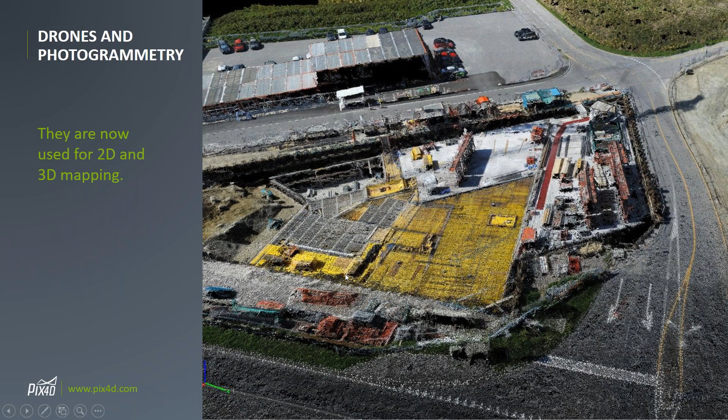So just to summarise, from my perspective, really why drones are a great advantage to the construction industry. I've listed here kind of 4 bullet points I feel are some of the advantages for using drones in the industry.

Having no access to the site is actually quite important. Not having a surveyor or a BIM integration manager or somebody else doing checking or certification walking over the site is a big advantage here. Health and safety is probably one of the most important things that construction companies measure themselves by and are measured by these days. And of course, having less people on site is a huge advantage here for them.

I think the second point is that the equipment is very affordable now, whereas many years ago you probably would be investing tens of thousands of euros plus the actual expertise you need to have to fly these pieces of equipment. Nowadays, you can go to a website and buy these pieces of equipment very affordably. The idea for most of the construction companies I speak to is they'll have a drone on every site, and the drones will be really kind of consumer level drones with a good camera.

I think the third point is very important as well. Traditionally, getting results from a surveyor immediately is probably quite difficult. Obviously, you can use different techniques such as GNSS, or you can use a laser scanner on site and get very perfect 3D point clouds, for instance, of the site.

But there's an investment there in time as well, that you cannot simply fly the drone and get the results within half an hour, which is possible with modern technology. You'd certainly have to go away and spend some time processing the results.

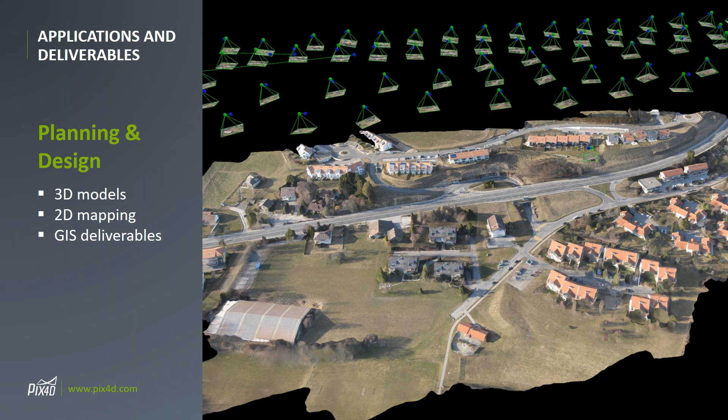And earthworks were probably one of the first ever applications of drones in construction, which became an immediate success because the commercial value is immediate. So rather than walking over a stockpile with your GPS or total station prism, you're actually flying. So it's a much easier and safer way to capture the data.

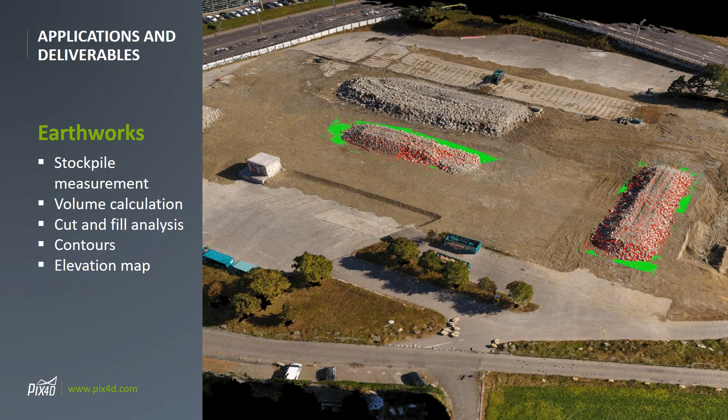And also gathering data on a stockpile from an aerial perspective really gives you a proper view of the complexity of the top of the stockpile and therefore more accurate results. So I think it was a very quick win for drones in construction was to use them in the earthworks industry.

And the real benefits now that are coming from, I think most of you on the call will agree, that the benefits of seeing an image like this on a daily or every few days basis is incredibly valuable for the construction industry. So these ortho photos you're seeing now are highly visual. Obviously they're orthographic, so they're compatible with your CAD or BIM systems, and they're completely scaled and geo-referenced, so you can make measurements from these. They're really like a fully scaled orthographic photograph.

And this can be used for day-to-day operational planning on site. It's a great communication tool. You can imagine showing this to somebody and explaining to them about site access and safety areas and danger zones and where to work next and where to lay down equipment and these things. It's a very good tool.

And in fact, it's very interesting when I visit some of my customers and see them having their site meeting every morning, and on a big TV screen, they often will show these kind of orthographics from the day before and use that as their communications tool to explain how today's work packages will be issued and any particularly interesting points from the previous day's work as well could be discussed. So it really is becoming a great communications tool, just at the operational level.

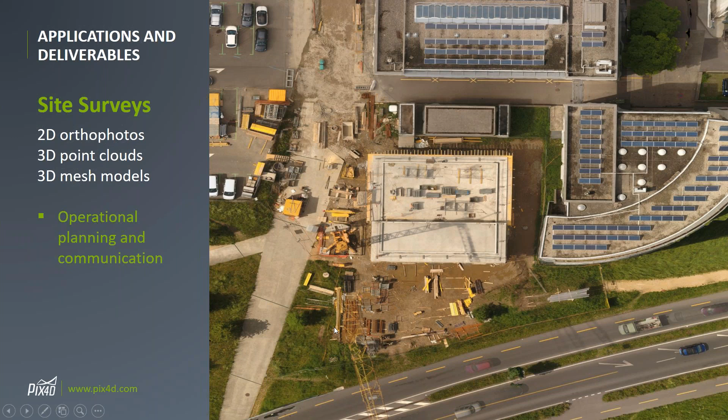But if you extend this to looking at the fact we're getting data on a regular basis, here you see a sequence of 6 days worth of data. We all know construction sites are constantly changing environments, so it's important to track these changes, not just to pick up scheduling errors, but also to work out best practice and these ideas. So having this kind of timeline of information for the construction site is invaluable. These are evolving environments that you need to have the data for.

One of the biggest benefits we've seen from customers using this data, which was surprising to me, was that going back and checking the status of a site on certain dates for legal or contractual reasons has become very important.

Being able to go back, for instance, to the 10th of May and settle an argument with a contractor about whether rebar was positioned or not on that date, or whether concrete could be poured that day, is something that's probably changed how contractors behave with their managers.

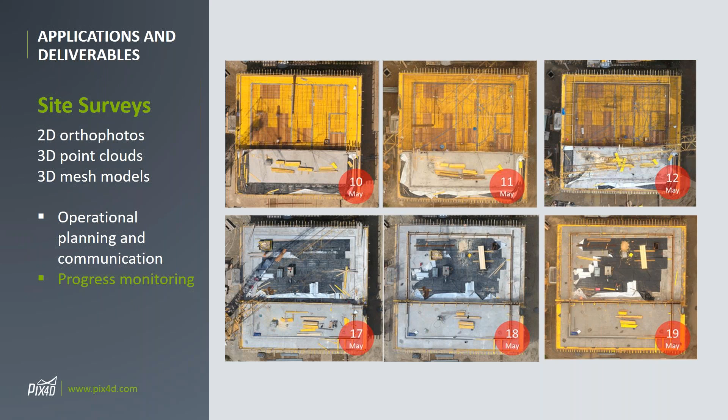Just one small example of how these things really are becoming money saving. The value isn't just in health and safety and convenience - there's also real euros, dollars, or pounds to be saved with this technology if you're regularly checking your site. This is a real example from a customer.

You can see on the 10th of May that the rebar is not quite complete - the meshing is not complete before the concrete pour. On the 11th of May, it's complete. Everyone's happy, we can go ahead, and you can analyze the formwork locations and the exact density of the rebar in different locations.

This is a real story from the customer, who doesn't want to be identified. You can see two small blue circles on the right-hand side on the 11th of May - these are polythene masks used to create a hole in the concrete, a penetration which a downpipe can go through.

Two of them are on the south part of that concrete formwork, but the one in the north is not there - there's a third one missing, and this probably would never have been picked up.

The consequences, you can all imagine, would be that the concrete would be poured and there'd be no penetration in that particular part of the slab.

Maybe 3 or 4 months later, the guys arrive with their stainless steel ducting to put the heating system in, and there's no hole, so they'll go away. The hole has to be created, new concrete has to be feathered in. This creates certification issues and probably delays commissioning of the heating system, which can't be installed on time.

Therefore there's a budget and schedule consequence, and also some safety issues, and I guess the reputation of the contractor or the project owners as well.

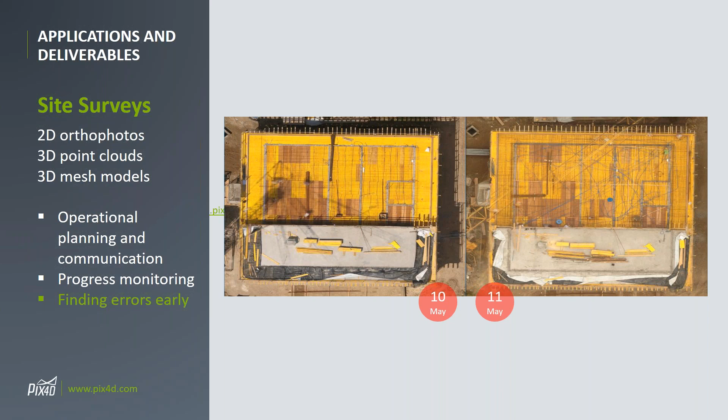Many people doing presentations like this will talk about a number like 15%, which is the cost of a project pre-allocated for rework. If we can start saving some of that money through the cost of drone implementation, this is very important.

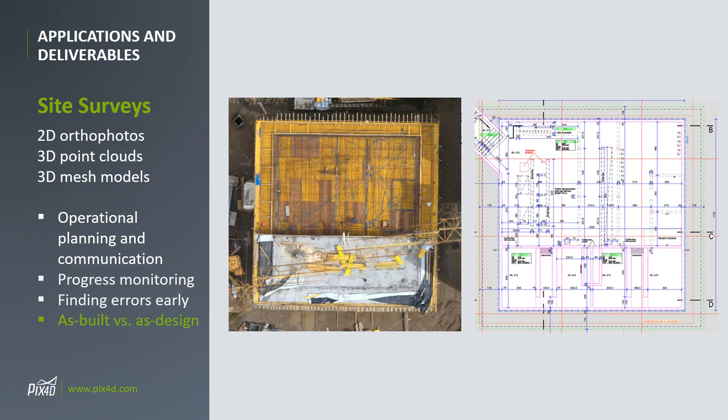I guess the perfect solution is to take your daily drone data and your BIM or CAD design drawings, or maybe your scheduled drawing for that day, and simply overlay them - making them a little transparent as well. You could visually or automatically inspect the difference between the as-built situation and the as-designed or as-scheduled situation. You could see immediately some great savings there.

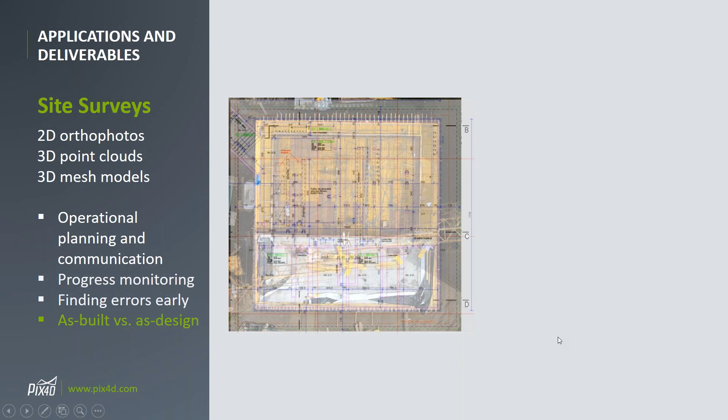Just moving quickly on - taking the 3D data we produce, which is basically a point cloud, similar to what you'd expect from a laser scanner if you put one on site, these can easily be installed within your BIM or CAD applications.

The example here is somebody putting the 3D point cloud into Revit, which is kind of useful, but of course Revit's a design package, so you don't always want to show your as-built data against the design. It's better maybe to use things like Synchro, Connect, or Solibri.

That's really where the construction effort is going in to do some model checking that way. So we can also import this data as IFC into these various other packages.

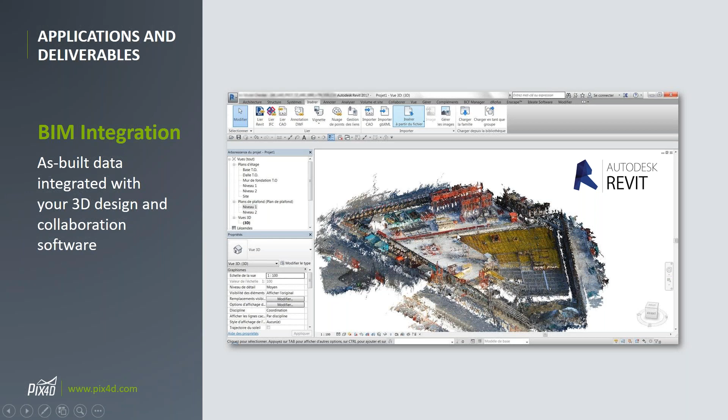And just to bring the whole thing full circle, every point in the 3D point cloud, every point in the 3D models, also has associated with it the high resolution images which we used to create that 3D model. And of course, we give our customers access to those images. So what we're also having here is a full inspection tool where you can go back, select a point on the 3D model, and access these highly detailed, highly valuable images for yourself and start doing inspection.

Either during the construction phase itself, maybe during the handover phase, or certainly during the most important part, the many years worth of operation, where you want to keep this building refurbished and potentially re-maintained. I'll hand over to Harvey in a minute, because I think one of his key messages is that people started using drones in construction mainly as an inspection tool. What's interesting is that it's not just for inspection anymore, people have really moved from using a drone for inspecting to using a drone for mapping.

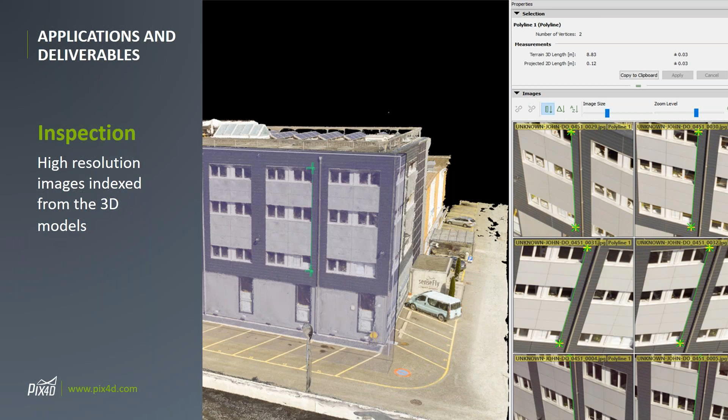On that note, Harvey, I'd like to hand over to yourself. It's with pleasure to introduce Harvey Jessel, who's the Innovation and Technology Manager from Costain. Harvey's going to explain how he started using drones and how that's impacted his values with projects. Harvey, over to you, sir. Thank you, Julian. Thanks for today.

So my name is Harvey Jessel. Currently work for the Costain Group. Been with Costain since 2013, and have undertaken many different roles within Costain. But currently, I'm the Innovation and Technology Manager for Costain on the 820 Thames Water framework. Been on that framework since 2016.

We've actively been using UAVs with Pix4D software to create photogrammetry outputs for all our water treatment plants, leaving a reference point, a digital reference point, every time we fly out on a site. I think that's quite important, because I believe it will be valuable for the next generation in terms of the data set. So that's why we went on this journey.

We've been working very closely with our client to achieve the process of UAV use in construction, including all the governance we had to go through. Thames Water have a standards 28 document, which we had to relook at many times to understand how we're going to comply using UAVs on Thames Water sites. And we came up with quite a robust health and safety process and mechanism.

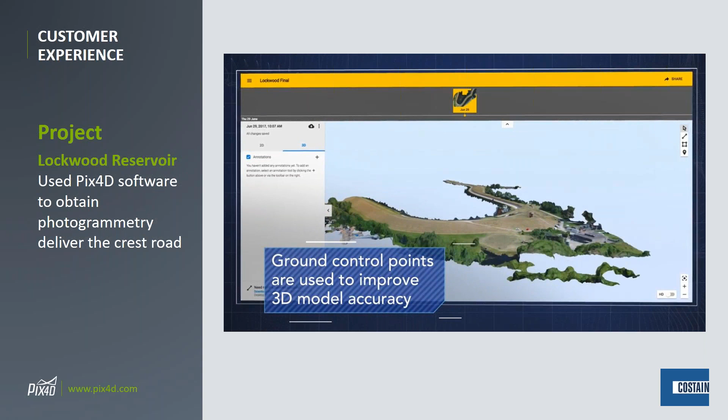So we used 3D photogrammetry because it was a lot safer than having a traditional surveying team out there to capture all that information. So we decided to do it via drone. As you can see in some of the pictures there, we incorporated the DJI app, and we also used Pix4D software on the side.

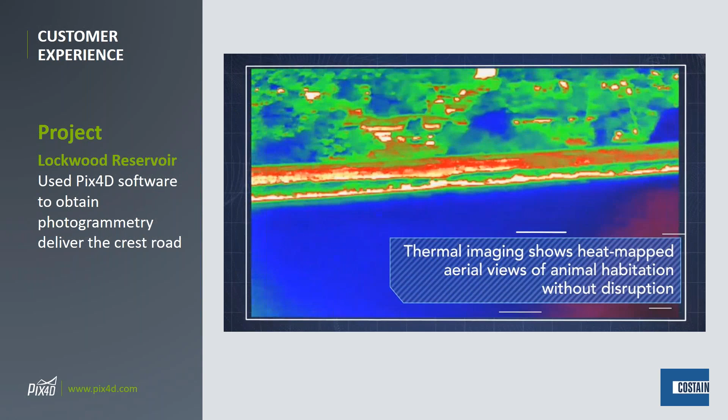Thermal imaging, we needed to understand in terms of birds and wildlife that was present there.

We have a digital center within a Thames Water site where all the processing is done, and all the equipment is kept there.

So this is some of the thermal imaging that we used. As I said before, we're going to be using it for leak detection as well, and also wildlife. We've got many embankments to do, and it's been really successful on our first one.

Also, by using the Pix4D software, we're able to give a clear 3D map and image to Balfour Beatty, and now they use that in most of their design work, etc. going forward. I think the biggest thing is it basically stores a reference point, and the key benefits are: one, it stores a reference point, and second, it's in the cloud, and you can track each month how the site's progressing.

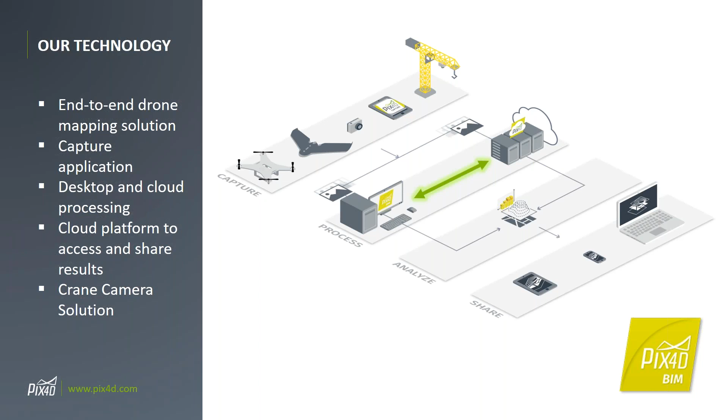I think it was pretty much like with any other software, it's about understanding what the outputs deliver. For us, the health and safety survey we conducted on our second one kind of convinced the operations team and the project managers. Now today I see project managers who weren't against it, but didn't really feel there were going to be key benefits. Now they're using it as a measuring tool, which is quite surprising.

Further to that, I think it's having that digital reference point that's really convinced them - they can get access to it anytime, anywhere around the world, and share it with any subcontractor. I don't believe if we didn't have it, it'd be very difficult for us to continue flying on Thames Water sites. But it's down to the sharing, the webinars, and the presentation of what it can actually do. So yes, it was tough at the beginning, but it's proven to be very useful now.

Interesting, thank you Harvey. I think the final question I'll take myself - we've had a few people asking what Pix4D's plans are regarding the use of the point clouds themselves that were generated from our software.

One of the things you may have understood if you look at the Pix4D website is we've already started doing point cloud classification - the idea that we can specify and classify the point cloud into things like vegetation and buildings. So the value for you is if you're doing a DTM of a hillside and you want to remove the vegetation, that can be done automatically in our processing, taking away that labour-intensive part where you'd have to identify trees or cars on a road - so you can remove vehicles automatically.